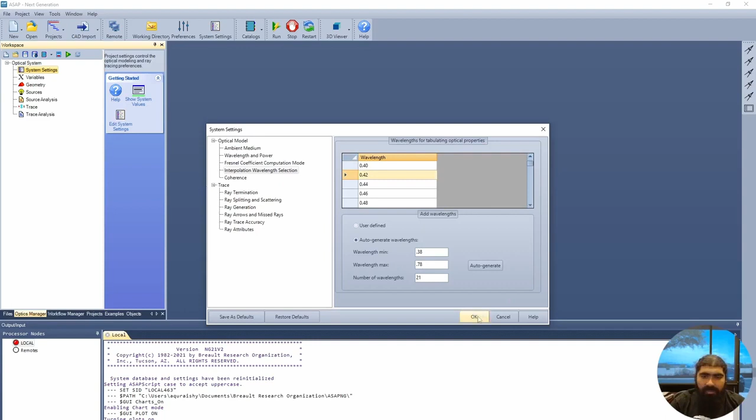Now we will go into interpolation wavelength selection, because this allows us to define the types of wavelengths which will be used in our system. We're going to go down here to auto generate wavelengths through the visible spectrum, 0.38 to 0.78, and let's try 41. When we press auto generate, we get an error because only a maximum of 40 wavelengths is allowed. As much as I would have liked one for every nanometer of length, we have to choose a smaller unit, so let's go with 21 and auto generate - nice evenly spaced wavelengths, 0.38, 0.40, and it will get the job done. So we have the interpolation wavelength selected, and our system set up for a polychromatic light source.

Next we're going to start defining our variables. First we'll look at our lens source, and we're going to keep everything in caps. So LENS, diameter, and let's go with 63. Next we'll go with lens curve.

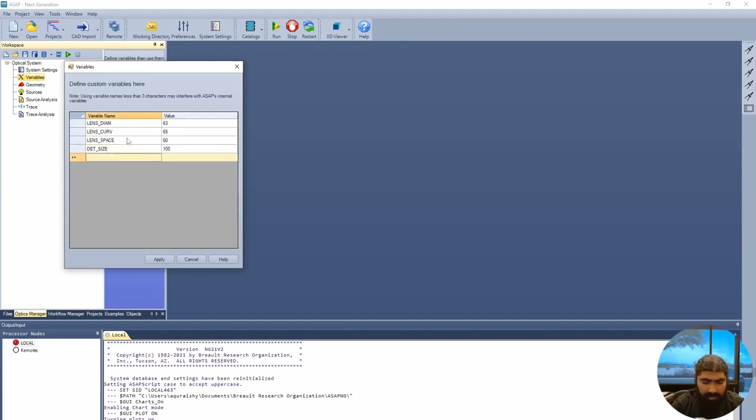Now for the record, despite the fact that I named it lens diameter, this will be a square lens - it's just how I named it before, so what can I say, I'm keeping it. We'll set this to 65. Lens space 60. Detector size, detector, and let's set that to 100.

So with that, let's just apply these changes, and now we have variables. Let's double click on it to make sure they were saved. Yes, they were. Now we're going to go with our geometry.

Let's insert a geometry branch and call this Chromatic BLD, Chromatic Build. Let's insert a geometry branch and begin with Singlet. If some of you have seen our radiometer example, this is very similar to that, albeit it provides other fun stuff, let's just say.

So insert geometry branch - let's go with detector. Yeah, this should be simple enough.

Now, under Singlet lens, we're going to insert geometry, and we're going to go with optical. Optical 1, z equals 0. Let's go with lens, and we will go with lens curve here. This one, I just had to check my notes - we're going to go with z equals 0, lens curve, and we're going to call this one front.

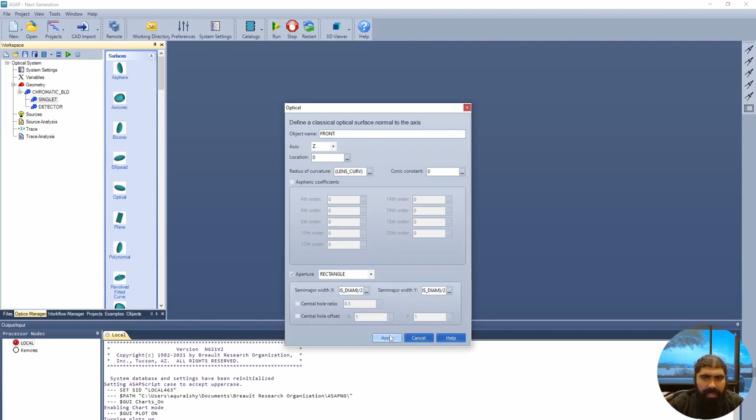And press apply. Let's see what we get here. We get this very interesting curved square.

Let's insert geometry, go back to optical, and this time select back. This radius of curvature we want negative.

Let's put location at... let's call it lens space. We'll use the lens space as being the space in between the two lenses. Negative lens curve, 0, rectangle, lens diameter.

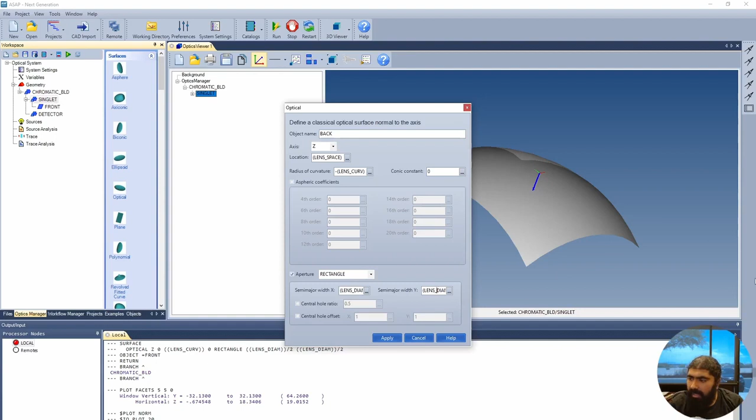Everything looks like we want it to be. Let's apply, and you'll see that you have these very interesting shapes. I've obviously made this a bit of an exaggerated curve, but that just makes the chromatic dispersion look nicer.

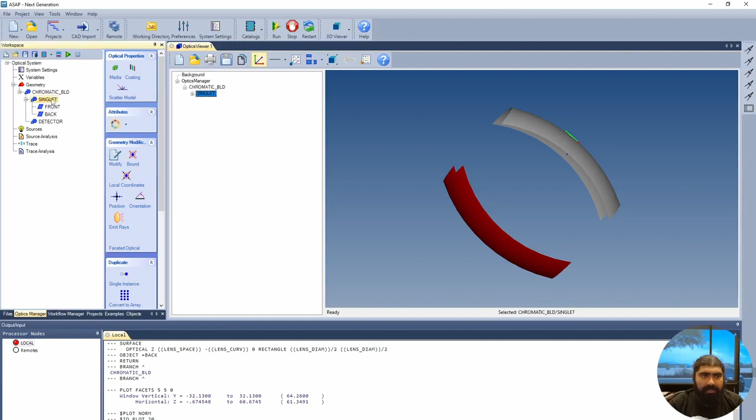So with that, let's insert one more geometry, and this time it will be a tube. Let's call this edge, bound by two curves, z equals 0.

We'll go with lens diameter divided by 2, for lens diameter divided by 2, lens diameter divided by 2. This is because, again, these all have the same feature. And lens space. We press apply.

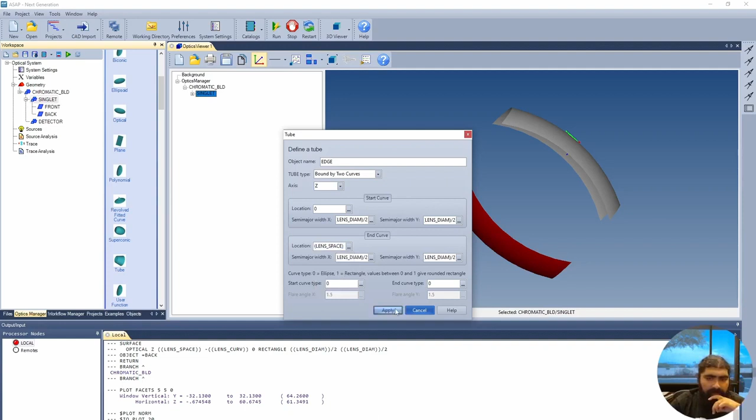That's strange. Huh, it's a circle. Well, that sucks, I wanted it to be a square. I wonder how we can do that.

Let's press modify. Oh hey, there's a curve type here: 0 for ellipse, 1 for rectangle. Let's see what happens if we press 1, 0.

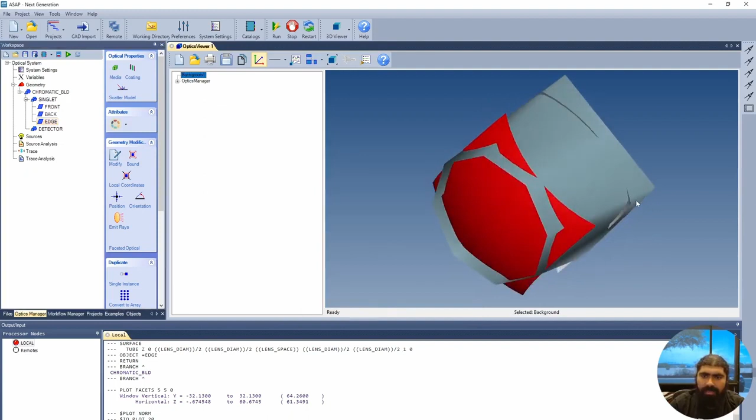Okay, that's getting better, but yeah, that's not what I wanted. Albeit it is an interesting shape.

Let's modify: start curve type, end curve type. Let's go with 1, 1. There we are. And thus we have this wonderful system inside a box.

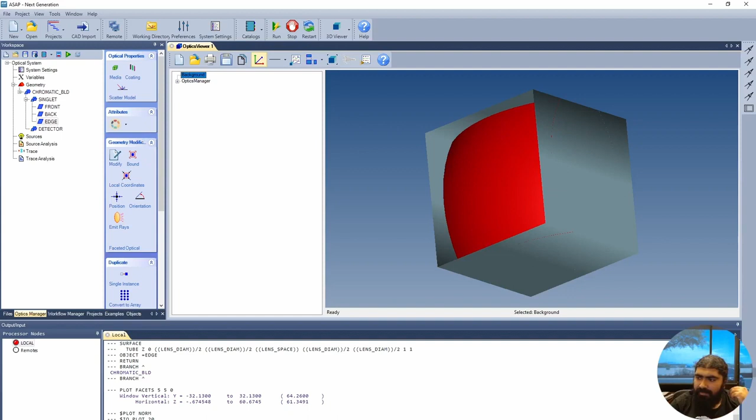Now I want to end it at the two curves, so let's go with bound, and we have the front and back. Let's go plus for the front, negative for the back, and apply. And thus, yeah, I'm liking this guy.

I think it's a good shape. And let's see where we can go from here.

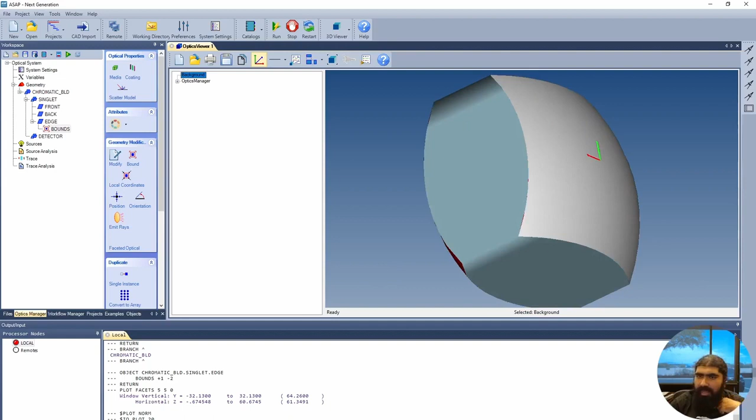Now that we have our shape all set up to go, we want to define the media, because right now this is just a geometrical shape. So let's go back to our singlet, select media: air, and let's go with fused silica.

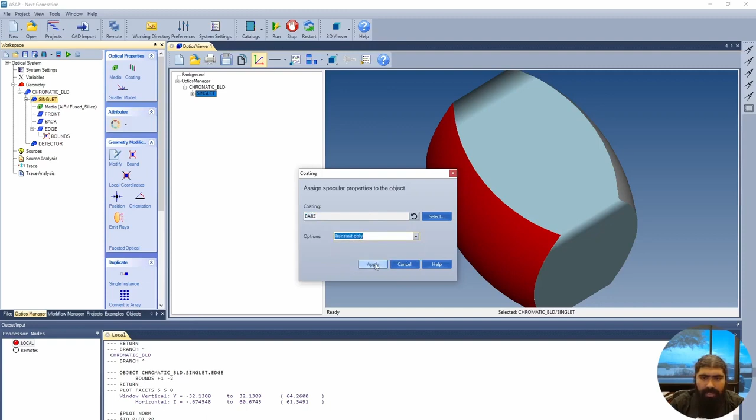Air and fused silica. And we will select the coating as being transmit only, and let's press apply. And with that, we have it all set.

Next, let's minimize this, and let's start setting up our detector. So we insert geometry here, and we're going to go with a plane. With our plane, we're going to set it at plane 1.

It's going to be orthogonal to the axis, but for location, let's select detector position, det pos.

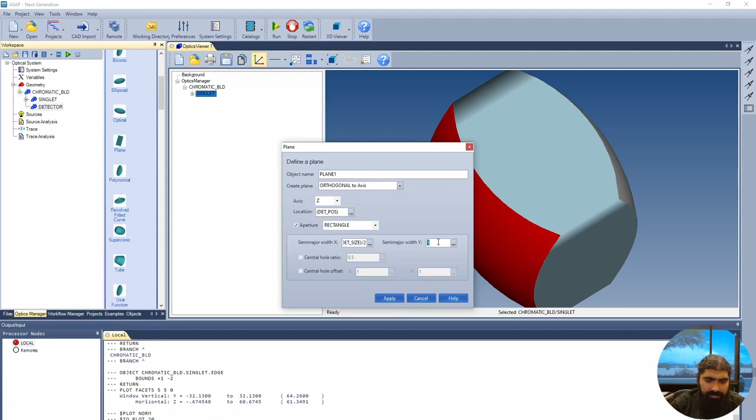Aperture will be rectangle. Semi-major axis will be detector size divided by 2, and we'll Control C, Control V ourselves. Let's press apply.

That's looking nice. Let's see how we can go from here. So let's select the light source that we want to work at. So we have our sources, and now we want a rectangular source.

So we have grid rect, Z 0. Let's go with 11 by 11 — I like 11 by 11, nice prime number. But I don't know if I like this row start and row stop.

So we have source size for that. Source size, divide by 2. And row stop being source size, divide by 2.

Control V. Now, the one thing that's important here is we want it to go from negative to positive, so negative, positive, negative, positive.

Now that we have this set up, we'll have the total flux of 1 and wavelength being 550 nanometers. We'll keep the ray type as being collimated. And with that, let's press apply.

For the record, there are multiple types. Collimated is just a good system that creates a collimated light source.

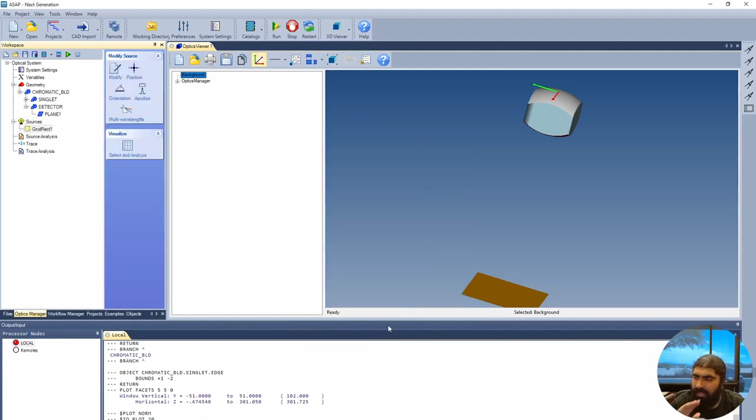Now, you'll notice, let's jump back to it real quick, that we have the wavelength of 550 nanometers by default. And you're like, wait, I thought you said this was going to be a chromatic source. Patience, let's get to that.

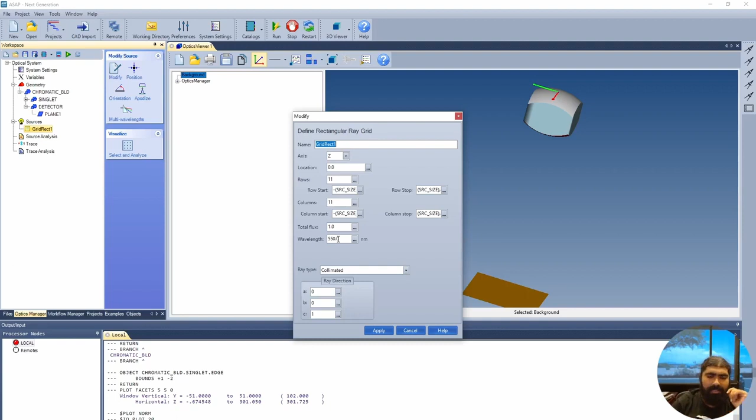So we press apply here. We press multi-wavelength source, and this is what allows us to define our poly source. The poly source that we're going to go with, let's go with D65.

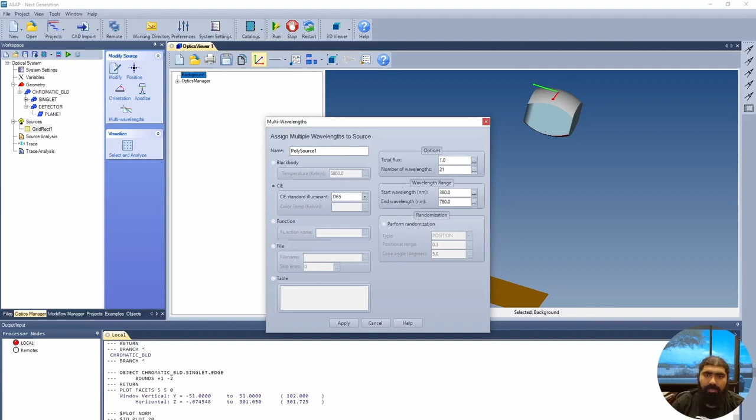Wavelength, 380 to 780. Total flux, number of wavelengths — let's go with what we had before, which was 21, that we already defined in our settings, and press apply.

With that, we're going to skip the source analysis. You can do it — it's a good way to do a sanity check — but let's go straight to trace, because right now we're mainly doing the build to show its qualities.

So let's plot rays. We wanted to do all rays, and plot the geometry. We'll go with facets, display, and Y and Z, 0, 0. Let's press insert, and trace analysis.

Actually, before we jump to trace, right now we'll just be looking at an image of a source going through the system. So let's run our optical system.

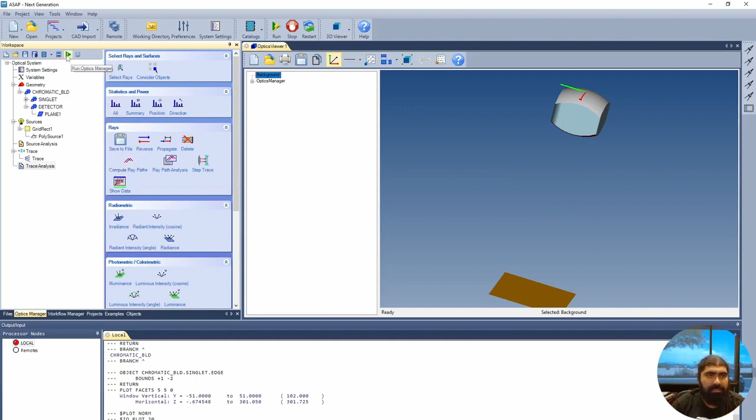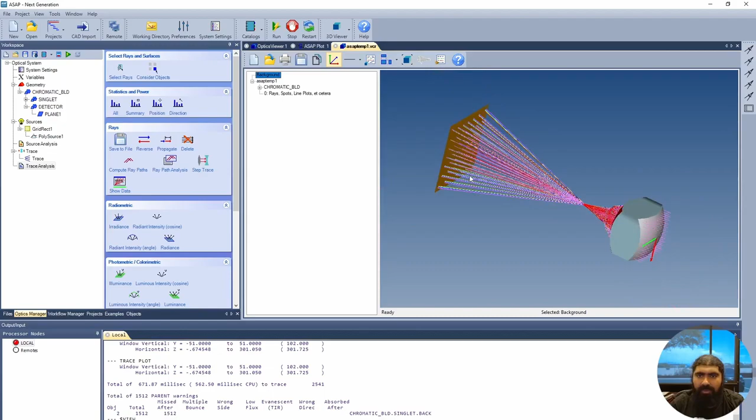And you see all the colors of the rainbow, and it hits our source very nicely. I must say I quite like that. You can see here if you zoom into these colors, for the most part they're all monochromatic pink, but over here you see how the colors diverge, and when you look at the arrows there are multiple wavelengths.

So let's go back to our ASAP plot viewer, and you can see the rainbow of the sources. Now let's go to trace analysis and consider objects. Again, we don't want the front, back, or edge, so let's unselect these. So what we have is chromatic detector plane 1. Let's press apply, and let's run our system again.

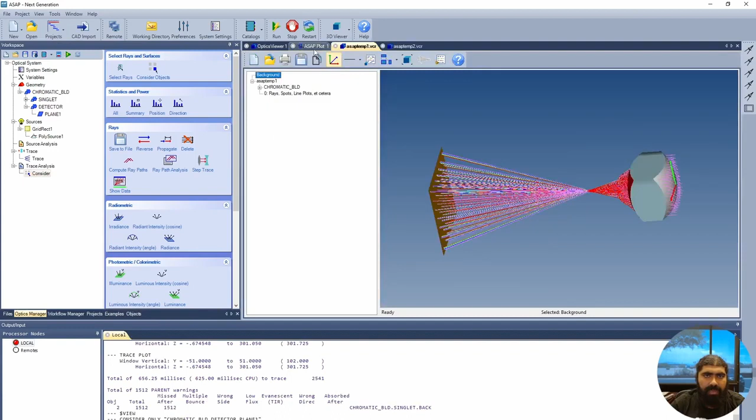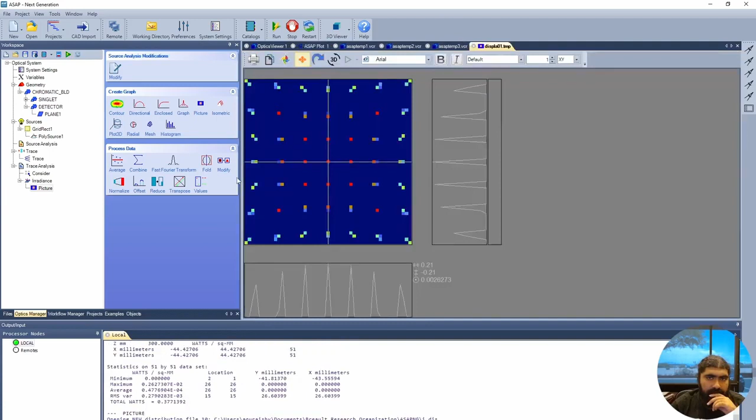And it ran. Let's consider the irradiance again. For vertical 51, apply, and let's go with picture and see what we get now.

And thus you can see the spread of it. The red shows greatly highlighted areas, and over here you see how the energy drops off. This is because it spreads. So here the source is very much together and it spreads out as it goes further out.

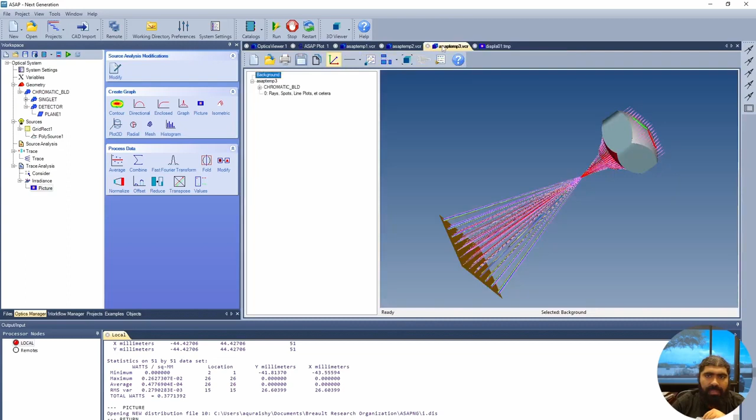So you can see this display here from minus 44 to 44 millimeters left and right. Now you'll notice here in the picture that we made, we can also see these pictures right here of the source. All of them are basically collimated at one location, but the further out we go, the further spread out our system is.

However, you'll also notice if we press the back button, you can go to our previous plot, and as we can see, sadly, not all the rays are coming through. If we zoom into this section, you see that some of them are trying to refract, trying to come out, but they don't have any place to hit. The reason for this is if ASAP doesn't see a ray as having an interaction, it will stop the source. So we have a quick way to fix that.

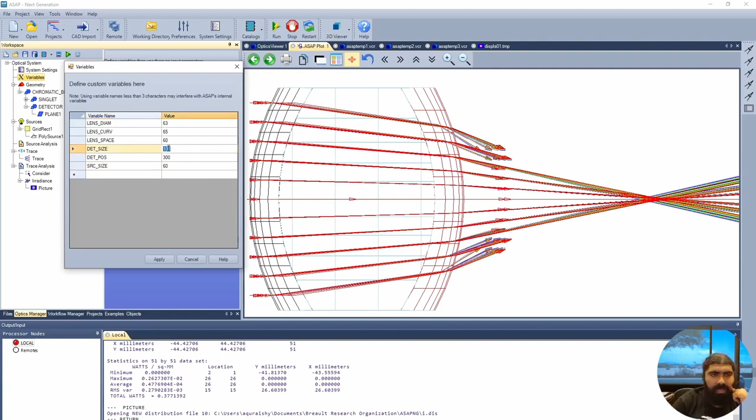Let's jump back to our detector size. It's right now at 100, let's jump it up to 300. Let's see how that does. Press apply, and we have a much bigger size now. Let's run again. And now all of them are hitting it.

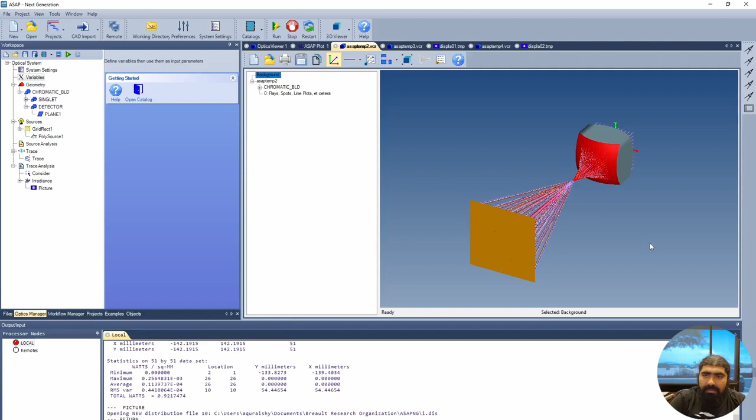And you can actually see a much larger view of our system, and you'll see how they bend at different places. A source that comes, for example, here around the edge. This is our old system. Give me a sec. Also, this one is the one I believe we're looking for. Nope, this is the one.

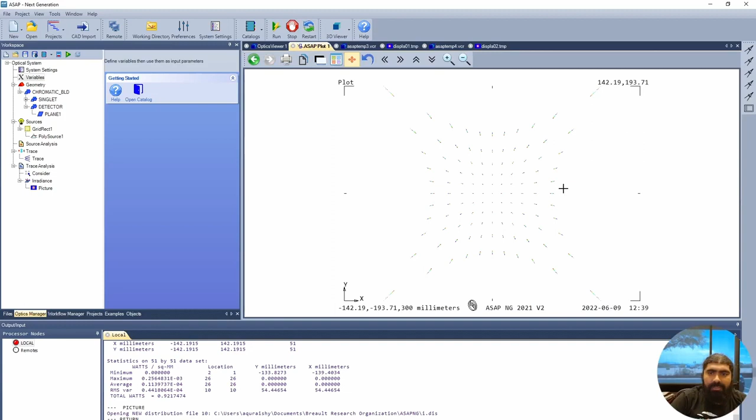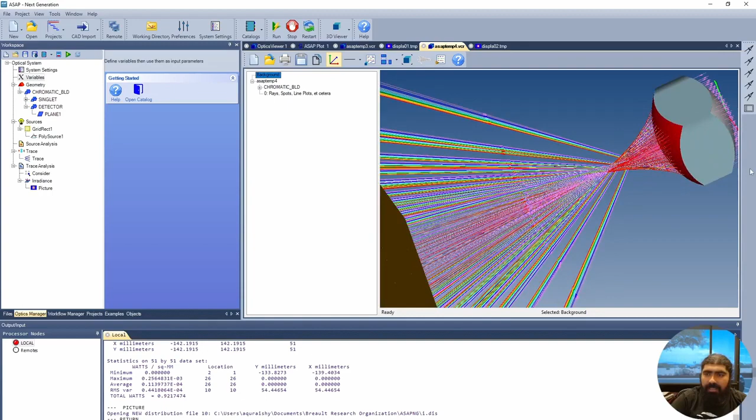This is the wonderful thing about ASAP: you'll have to figure out which windows, you'll have to manage these windows, because the plots will continue to be on the same page, but some of these other generated models will take up their own windows. So this is our old one, and this is our new display. You'll see that the ones that were closer to the edge end up being reflected at a more dramatic angle. This is because the normal here is at a larger angle, and the normal here is at a larger angle. So this is why you see some of the more outward ones deflecting outwards at the angles that they do.

And with that, we have a very interesting source for you guys to look at and study, and you can also use it for some of your lens designs, especially if you want to look at binoculars or cameras, for how you would deal with things like chromatic aberration—how lenses, because with real light, different frequencies have different indexes of refraction. So it's an important feature to keep in mind as you design future optical systems.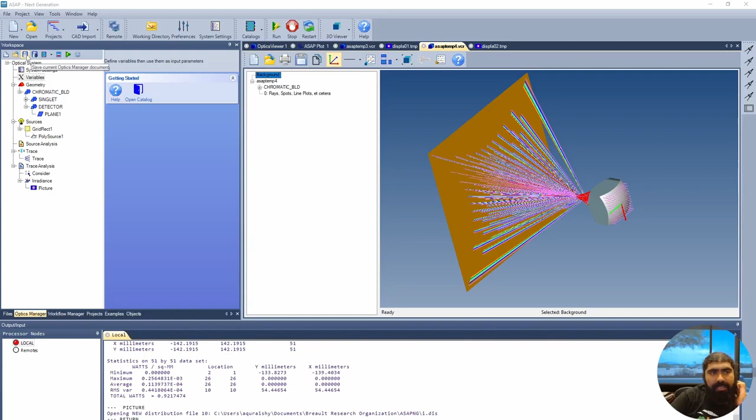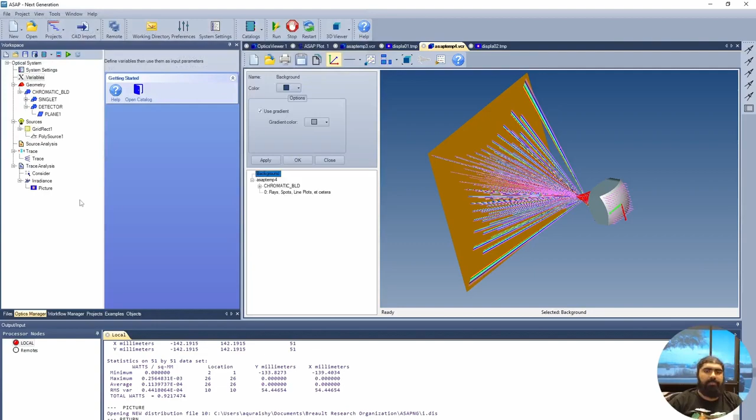Also, quick interlude: if you want to save your system in your workspace, be sure to press this icon here of the floppy disk from way back in the 90s. Not sure how many of you remember that quite well. And let's call it Chromatic Cube, .sdx, press save. And thus we have our system saved here. With that, be sure to always save your files—always better to be safe than sorry.